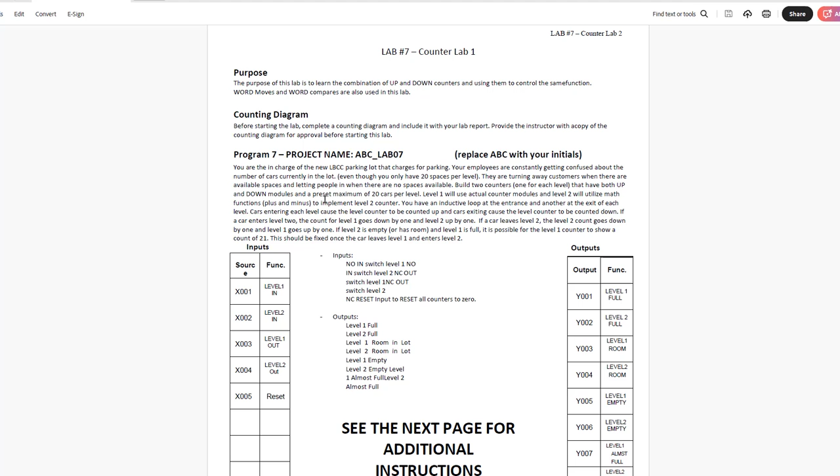In level 2, you have to use some math functions of add and subtract, and I'll go through all of that for you. So this is the specs, and I'm getting the feeling that a number of people are not going to the second page and looking at the additional instructions. And so here they are. You've got additional instructions here, and right here, you must use the add int and sub int instructions for level 2. Okay, go through all of that.

Now I'm going to bring this up, and this is the student's submission. We got a number of problems here. In first scan right here, that is only going to allow this counter to go up on the first scan. But it's being held in reset all the time. Well, let me go and flip my switch there, and okay. I'm going to turn the reset off, so technically it's not in reset all the time.

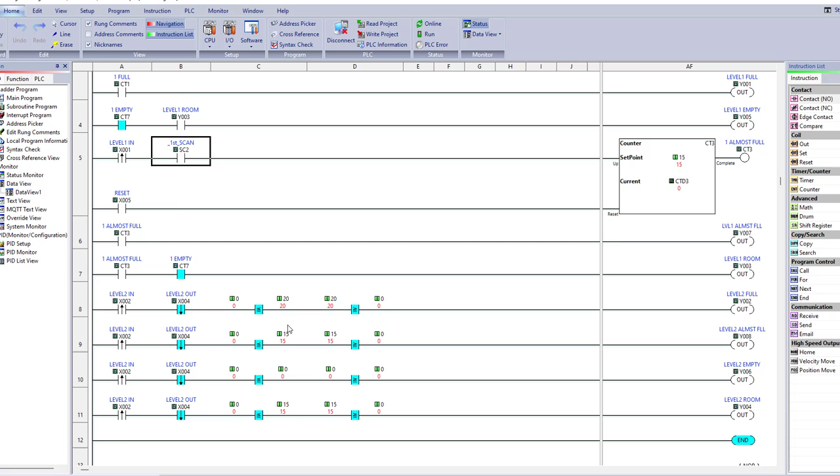Okay? But as you can see, I'm pushing level 1 in, and nothing is happening because this first scan contact is preventing power flow to the up input. And the same thing down here. I'm not sure why first scan was thrown in there all the time, but okay. So what we're going to do is we're going to take that out, take that out, and take that out.

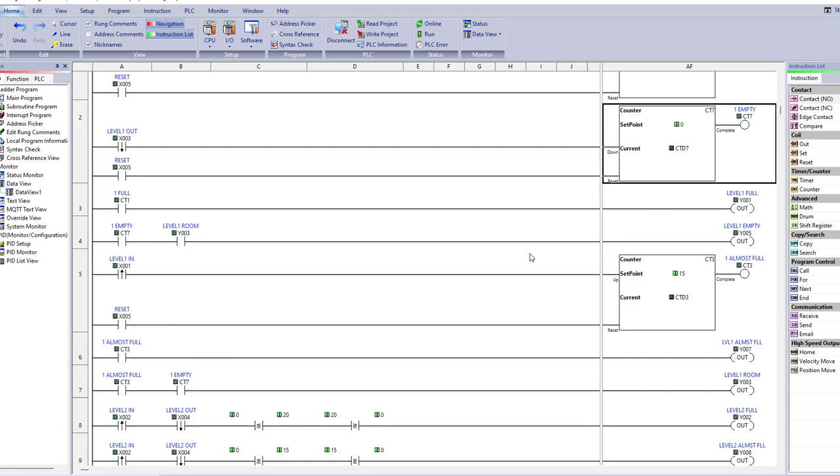Now, there are 3 counters here, and in the specs it said you only use 2 counters. Okay? An up counter and a down counter. And all of these other things are all the flags and doing the numerical comparisons and everything. And when you're comparing, you don't have to put these in here. There's nothing. You just compare every cycle. So we're going to delete these.

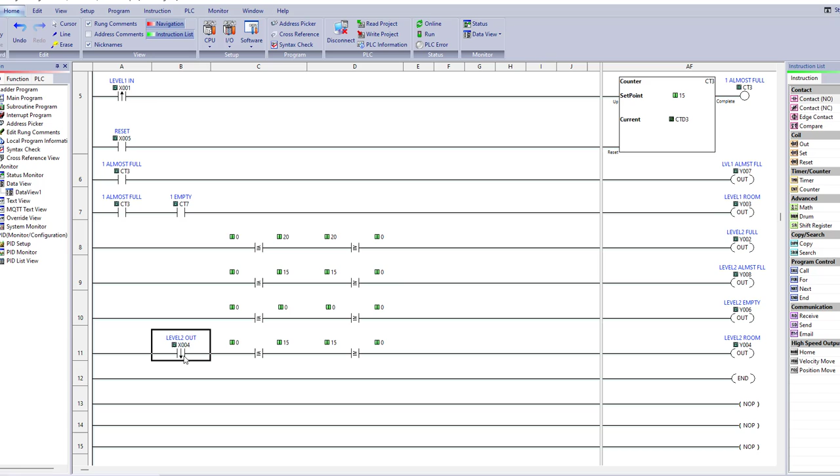Okay. Now, I see almost full on CT3. That really isn't an almost full bit. That's a full bit. That only goes true when that reaches a set point. Okay, I see what he's doing here. He's got another counter in there and changed the set point to 15. No, we don't do it that way. Okay? You can do comparisons, and that was the point of using comparisons like this.

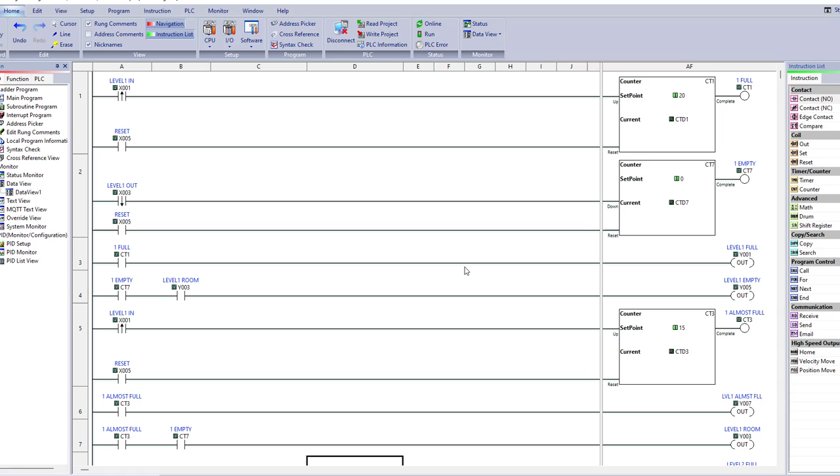I see you're doing level 2 there. Okay? But here's the problem. You're comparing 0 less than 20. 20 greater than 0. That will always happen and go true. It should be counting, or comparing, I should say. It should be comparing the data value for level 2.

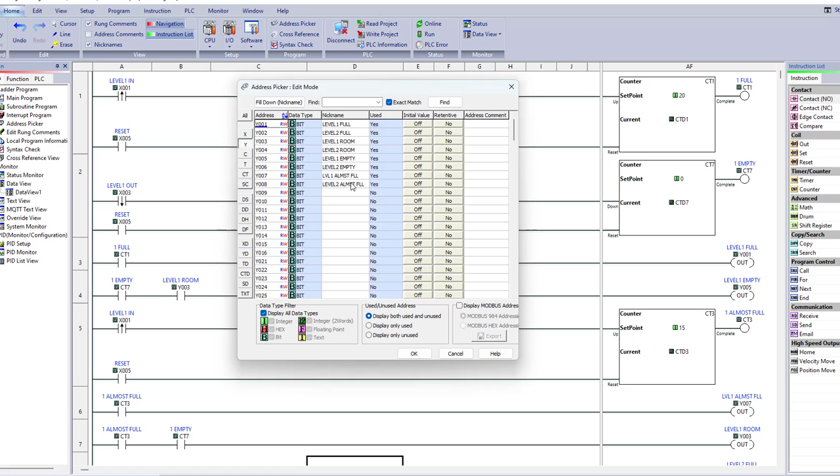So I'm going to go in address picker. We're going to see what's in here. See, we've got level 1. Okay, that's all good. Let's go look at the outputs. Level 1 full, 2 full, 1 and 2 room in the lot, 1 and 2 empty, 1 and 2 almost full. Okay, now I'm going to go to CTD down here.

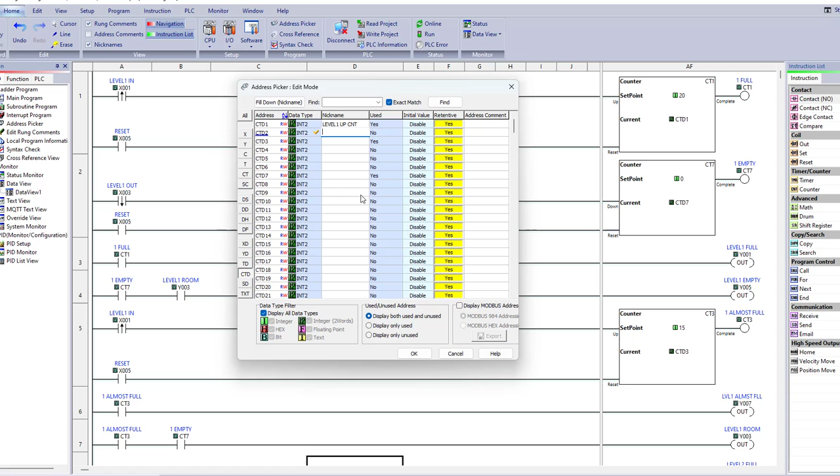Okay, CTD1 is, that's level 1 up count, as it's going up. Okay? And CTD2, for whatever reason, he's got CTD7 in here, but we're going to change that to be CTD2. That's your down count.

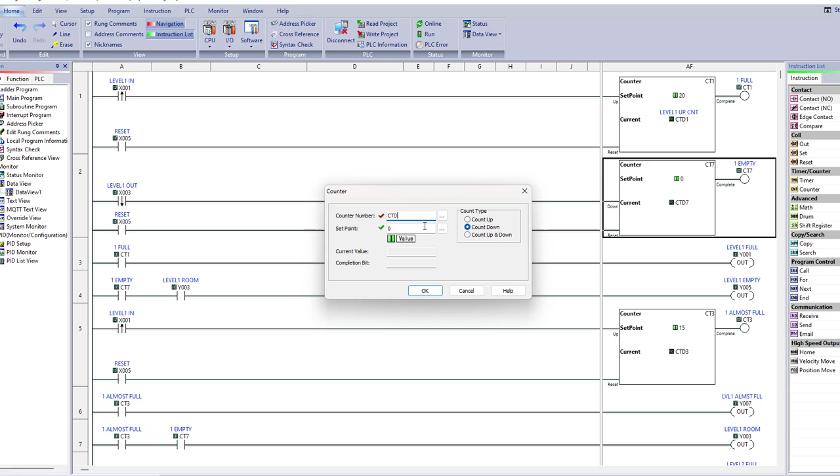Now, you need a data storage, okay? And this will be, there's your level 2 count. We'll come back to all of that later, okay? Now, I'm going to change this to CT2. There we go. Okay. So you can see 2 full, 1 full. There we go.

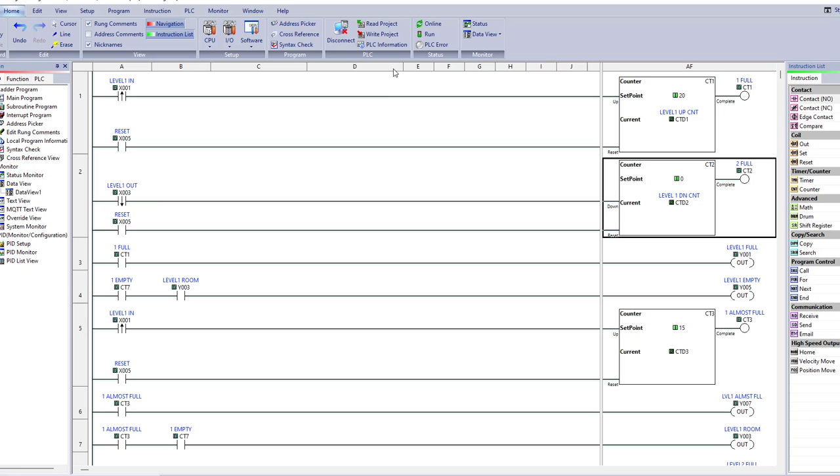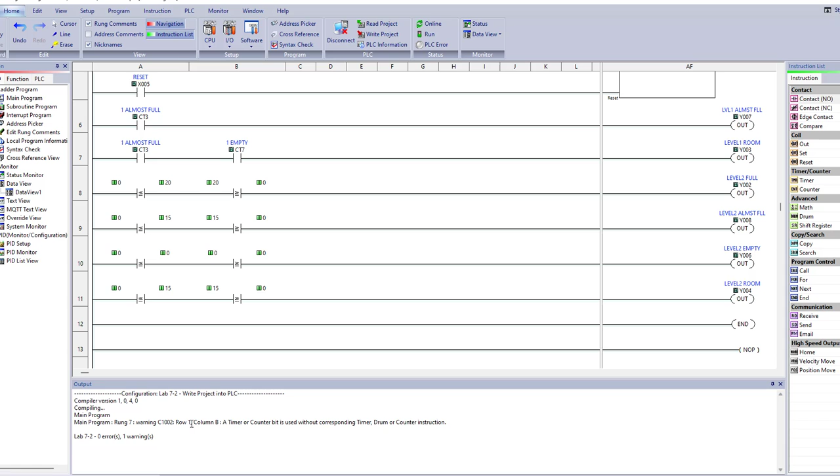And what happens here? Well, let me just go and write the project in, and we'll see what happens. Okay. A counter timer is used without a corresponding timer. Okay. Oh. There's a down. That's okay. All right. Let's go double click on this error message.

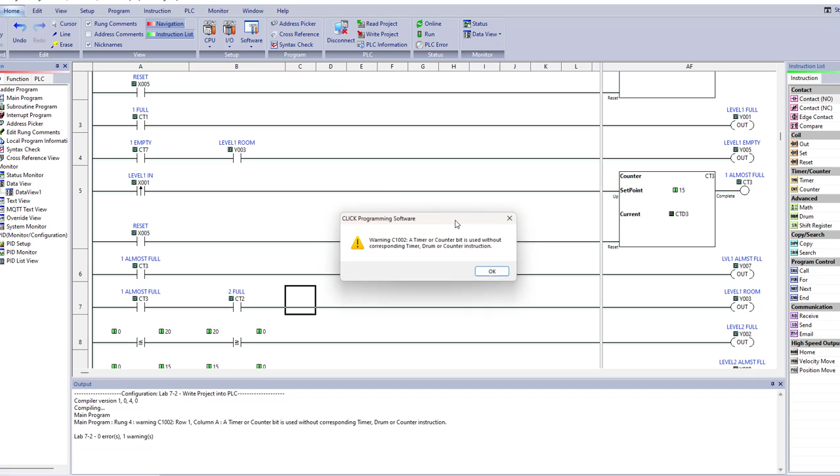Oh. It's telling me I'm not using that, so just to keep it in line with everything, we will change it to CT2. Okay? We'll come back and change that later. I'm going to write the project. Oh, another one. Where is that?

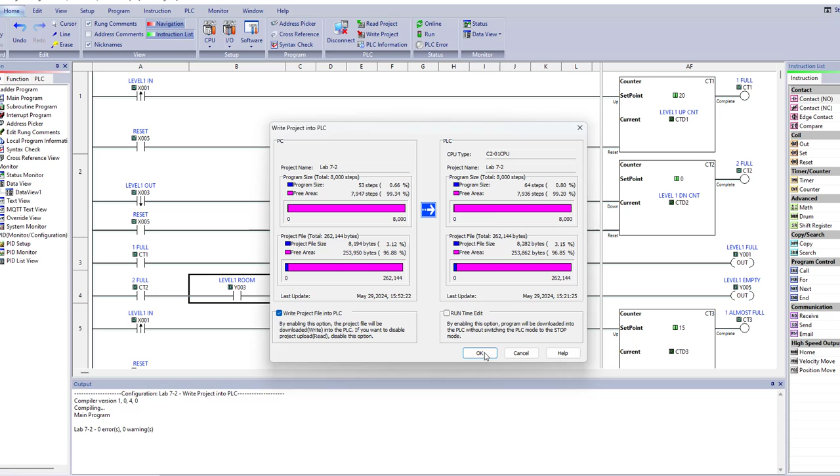Okay, again, CT2. Okay, the empty bit did not really make sense in the room bit. Okay, so we're going to go and fix that later. And we'll try and write it again and see how many more errors we got out there. Okay, it looks like we're okay now. It's writing out there. Okay.

Okay. So we've got 0, and look at here, we've got 17 in the down counter. All right, let me reset everything. Okay. And now we'll go up. You notice that my count is not going up over here on the down counter. So there's no way for this to keep track of both things. Okay? And this says full, but it actually should be empty.

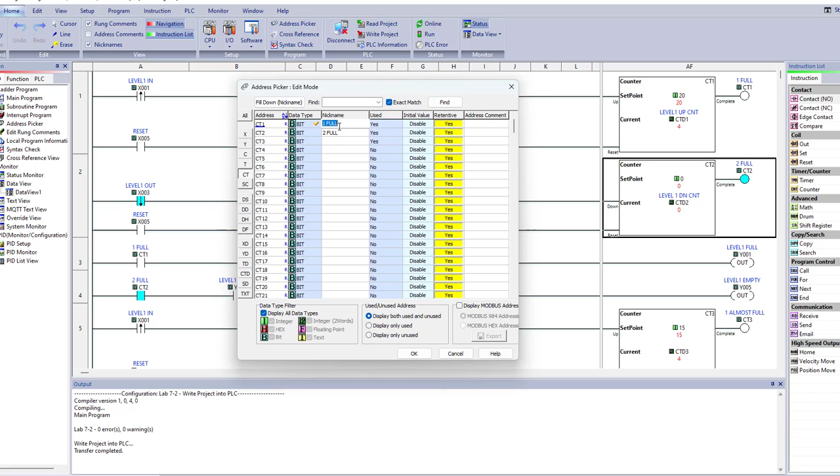Let's go back to address picker. CT2 is, and that should be 1. And it's not going to let me do that because I've got that down there. We don't have CT8. We're not using all of these. So we should only have 2 counters in this lab. Okay. CT1 is level 1 full, CT2 is 1 empty. Okay, we got that squared away.

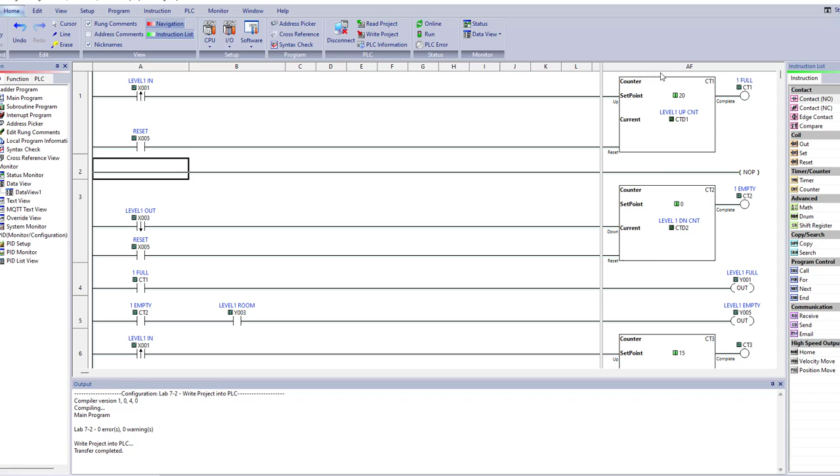Now, in my modules, there's a whole lot of stuff in there about using up and down counters and using a copy command or a move command to move the values between these counters. And so I'm going to come in here, I'm going to insert a couple of rungs, and then what I'm going to do is every time, unconditional copy, right there. And we're going to go from CTD1 to CTD2. Okay? Now what that's going to do is take whatever value is in CTD1, it'll move it into CTD2.

Okay? Now we got to do the same thing here when we're done with that. Now we're going to go CTD2 into CTD1. All right? Now, any operation on here will cause this to go up. They'll move that new value into here. Any operation will cause it to go down. And then this operation will cause that value to be put back up into here. So let's go write that and see what happens.

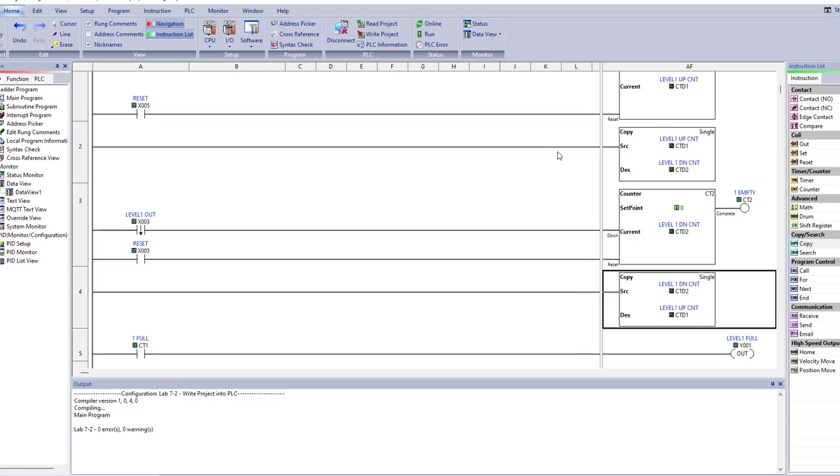Okay, here we go. You can see this. I've got 4, 4, and 4. Let me go reset it. Everything's back to 0. Let's go up, up, up, up. Hey, now check that out. All the values are the same there. The down counter goes down. Now let me try. I'm going to go out. So it goes down. Oh, check that out.

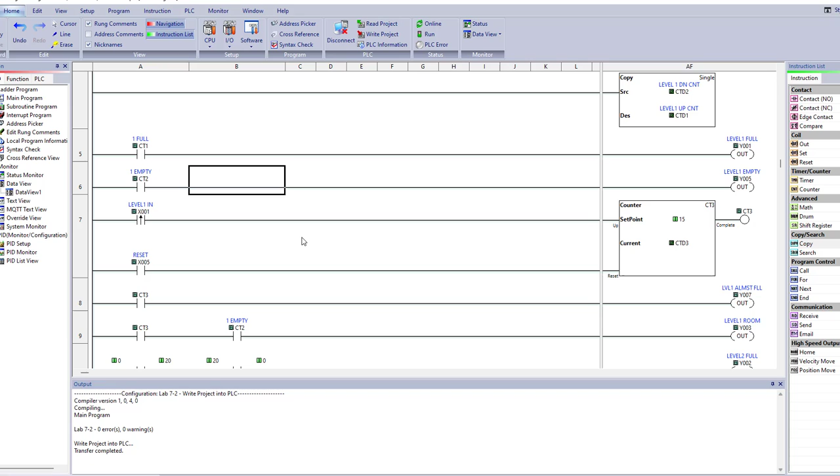All right. Now, I'm going to go up to 20. Okay. The one full goes high. I'm going to go back down to 0. There you go. The one empty goes high. Okay. So, the one full, there's that output there. One empty, we're going to get rid of this. There's no reason for that to be there. Okay, so there's your full and empty.

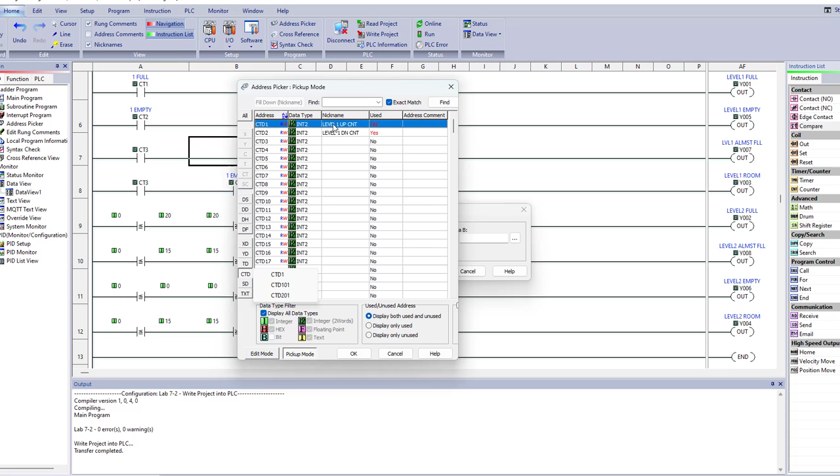Now, in this, we have an almost full and room in the lot. Okay, those are comparisons. We're going to get rid of this rung. And we're going to get rid of this, and we're going to say compare. And what do we want to compare? We want to compare the value in the counter. CTD1, level 1 up count. That's what we want to compare, not 0 or anything else. And if it's greater than or equal to,

well, let me go back and see exactly what it says on the specs. Okay. And you've got, here we go. Room in the lot is 15 or less cars. Almost full when it's greater than 15 and less than 20. All right. There's our answer. Come back over to here.

And so if this is CTD1, you want to say greater than 15, there we go. And do another compare. CTD1 is less than 20. Okay, and this should be greater than 15 and less than 20. We got almost full.

Okay, now room in the lot is when we are 15 or less. Let me get rid of this. We also don't need that. Okay, so room in the lot, we're going to do a good comparison.

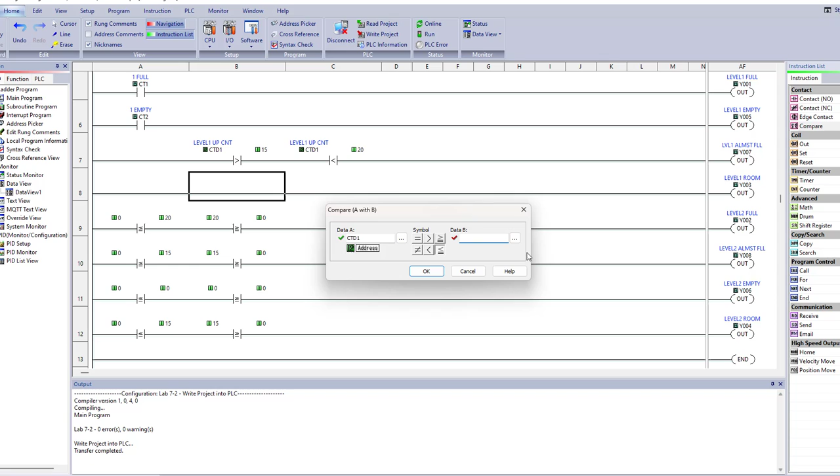CTD1 is less than or equal to 15. So if CTD1 is less than or equal to 15, we got room. And you know what? I don't know if that's in the spec there, but I was thinking if it's 0, we should qualify it for being greater than 0. But technically, we got room in the lot if there's 0 to 15. Okay?

Now, the same process has to be done down here with these, because these comparisons won't work. Nothing will happen. It's just going to pass it through. 0 is always going to be less than 20. 20 is always going to be greater than 0. And so that's just going to always pass power flow. So these won't operate correctly. Okay? So let's go and do this. You can see this is happening all the time. I'm going to write this in there.

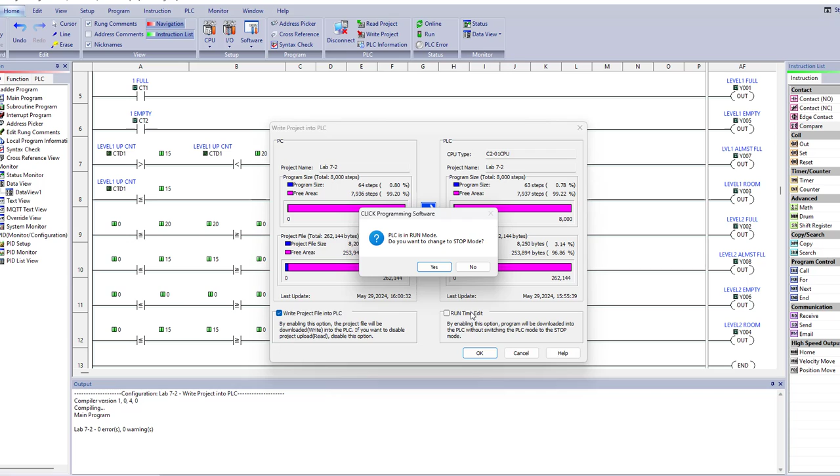Okay, so we've got count, everything all set up there, and we can go up, up, up, up. Let's go look at the flags down here. Level 1 is not full, level 1 is not empty, it's not almost full, but it does have room in the lot. Okay, so we're going to keep on going. There we go, it changed. It's almost full. Okay, now we keep going. Now we are full.

All right, now we got an interesting case here. What happens if we come all the way down? I told you can put more than 20 in there, because if you got 20 in the lot on level 1, now we got 24 in there. That means we've got 4 cars that can find space up on lot level 2. Now I'm going to go down, all the way down to 0. Now we're down to 0.

What happens if one more car leaves? We don't have a car to leave, but watch what happens to the counter. It goes -1, -2. Minuses don't make sense here, do they? So what we want to do then is come over here and put another contact in right here. And that's going to be CT2. As long as this lot is not empty, we can keep taking cars out of it. So I'll write that in there.

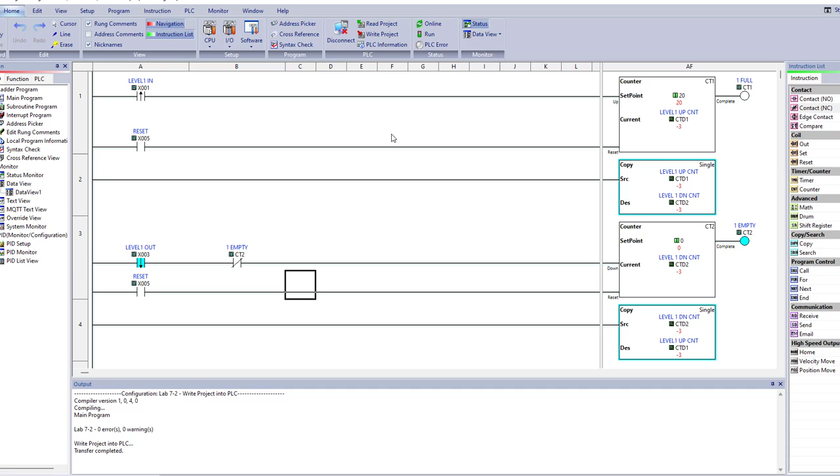Okay, now I'm going to try and take a car out, but you see CT2 is false. It's not going to provide power flow. I can't make it go down anymore. But we started off with it being -3. Now I could either operate the reset now to reset everything, or we can use that first scan contact. Let's do that. We're going to insert a rung, give a contact here, and we'll go find it. SC, and we want first scan right there. So if it's the first scan, and the first scan only, that contact will close.

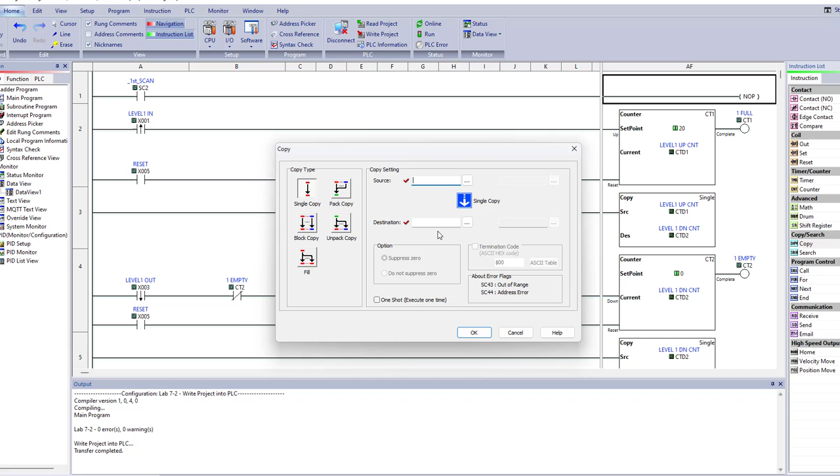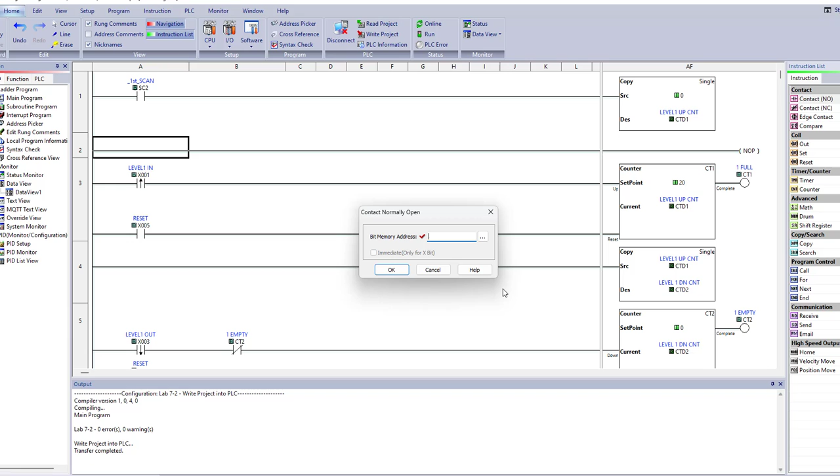So then what we're going to do is a copy, and we're going to say 0 is going to go into CTD1. Okay? That will clear it out. And I'm going to get you set up for the next one. Do another one. Another first scan. And let's go look at the address picker. Data store 1 is what we want. I'm going to do a copy right here from 0 into DS1.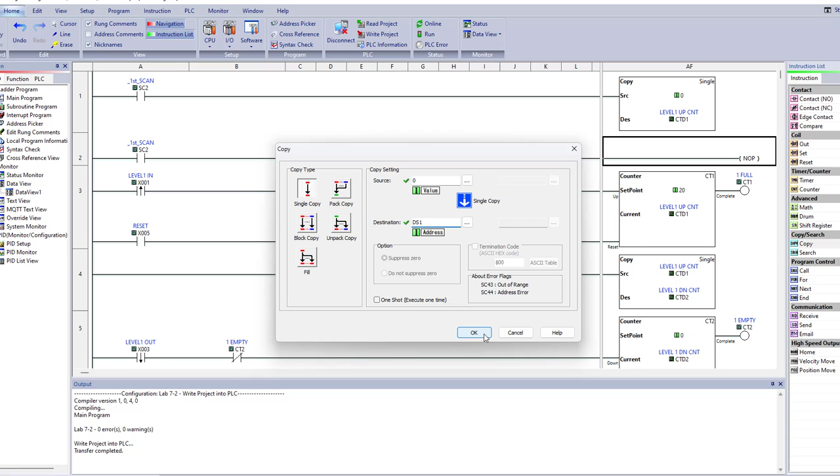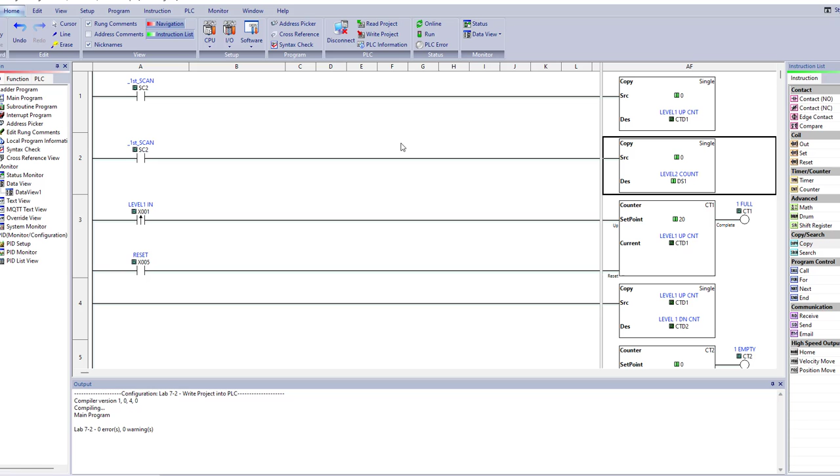Okay? Now, you can put reset in parallel with this and accomplish that at any time other than the first scan. But what this will do, we know that we've got -3 in there right now. I'm going to write it. So on the first scan only, it'll clear. Okay, you can see it all started off as 0, and I can go up. I've got 2, now I'm going to go down. 1, I'm at 0, so I can't go below 0. That's good. I can go over 20, but I can't go below 0.

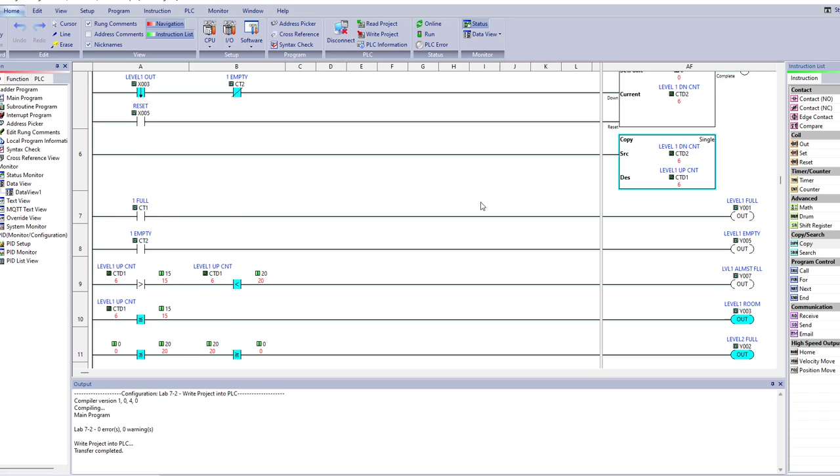So I'm going to wrap this video up here. I've gone way over my normal time for these, and I'm going to leave this for another video to talk about adding and subtracting from level 2 and taking care of that work at level 2. And I'll leave this for you guys to fix this and get the comparisons right. Look at this right now. All these outputs are high, which really is meaningless. There you go. Hopefully this will get you going in the right way.